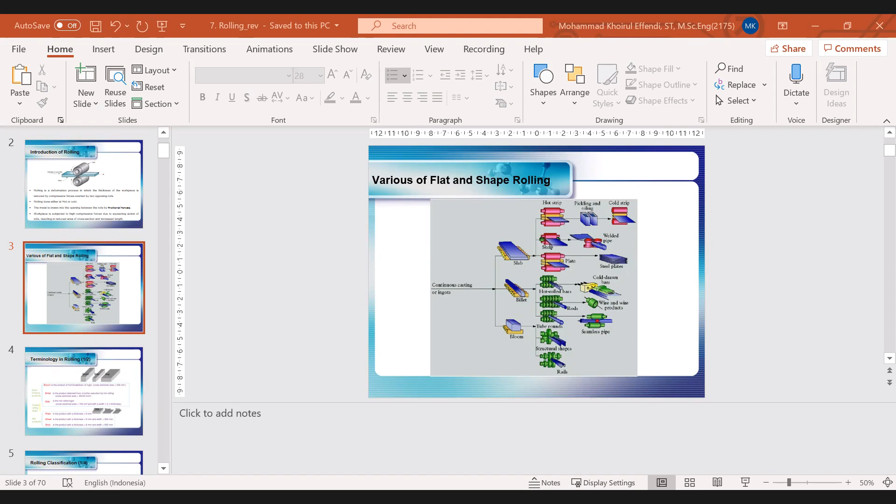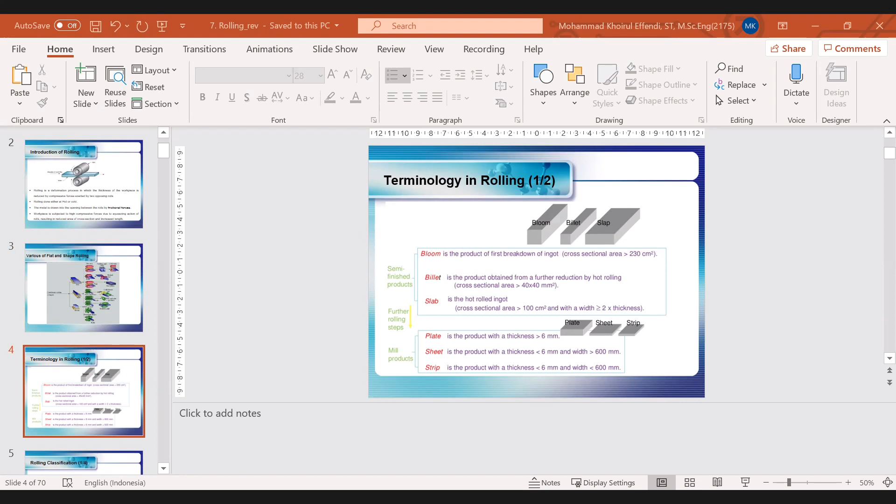Okay, let's continue to the next slide. What is the difference between bloom, billet, and slab? We can see that bloom is the product of first breakdown of ingot, and the cross-sectional area is larger than 230 centimeter square.

Billet is a product obtained from further reduction by hot rolling, and the cross-sectional area is more than 40 by 40 millimeter square. Slab is the hot rolled ingot, and the cross-sectional area is more than 100 centimeter square.

So between bloom, billet, and slab, the parameter that distinguishes these three kinds of raw material is the cross-sectional area. The slab's cross-sectional area is more than 100, and the width is more than 2 times the thickness, making it suitable to produce things like steel plates or welded pipe.

The welded pipe is produced from plate, using a specific roller to deform the steel plate into a pipe shape, then at the joining surface we must perform welding to join it.

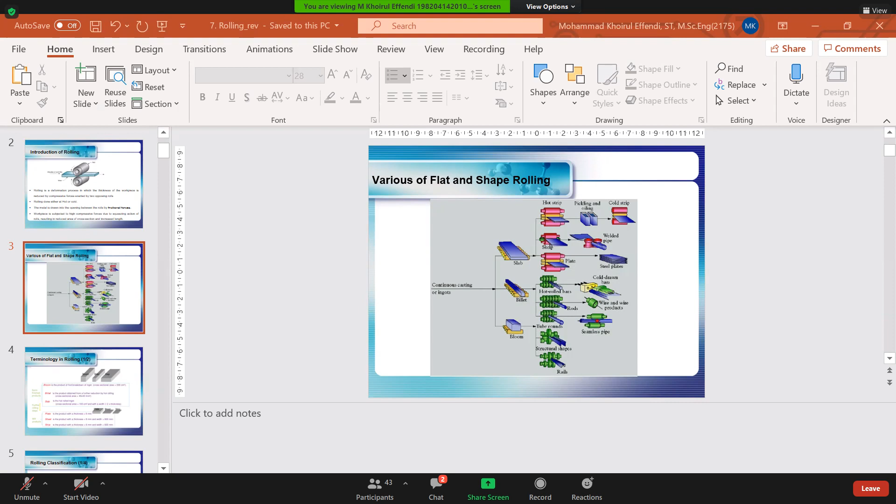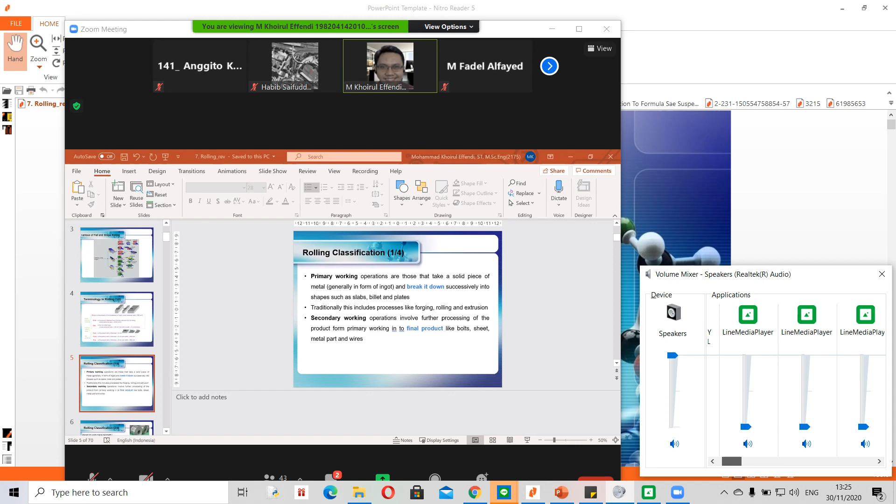So what is the difference between primary working and secondary working in the rolling process? Maybe Fahrul Gunawan can answer.

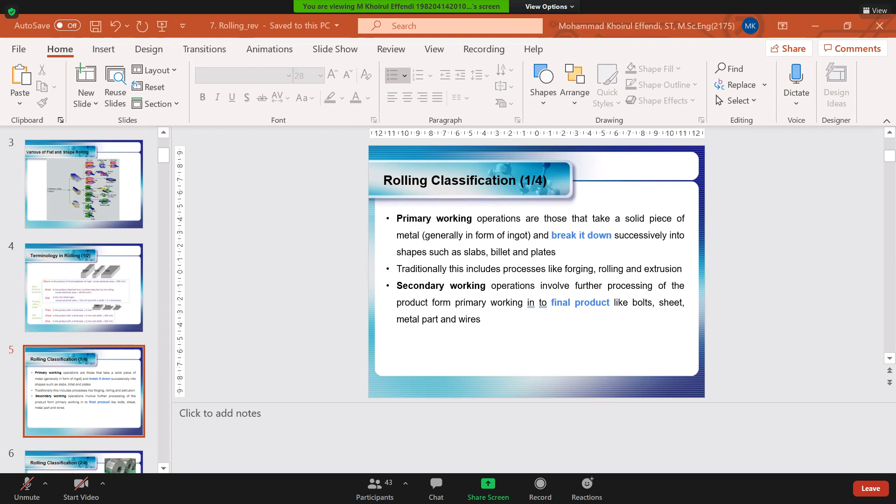So we can compare the product output between primary working and secondary working. Primary working products include slabs, billets, and plates, and we use these as raw material to produce final products such as bolts, sheets, metal parts, and wires.

Based on workpiece geometry, we can classify rolling into several types. We can divide rolling into two different types. The first is flat rolling, whose function is to reduce thickness with a rectangular cross section. The second is shape rolling, where a square cross section is formed into shapes such as an I-beam.

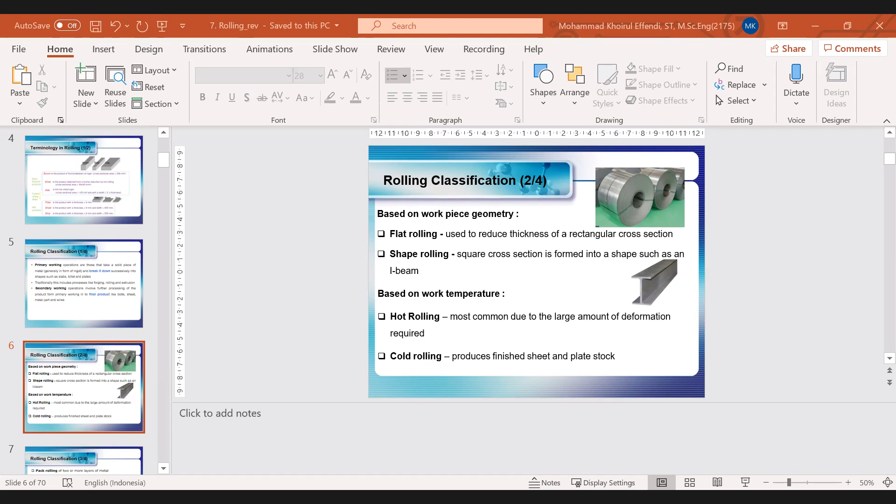Based on work temperature, we can divide rolling into hot rolling and cold rolling.

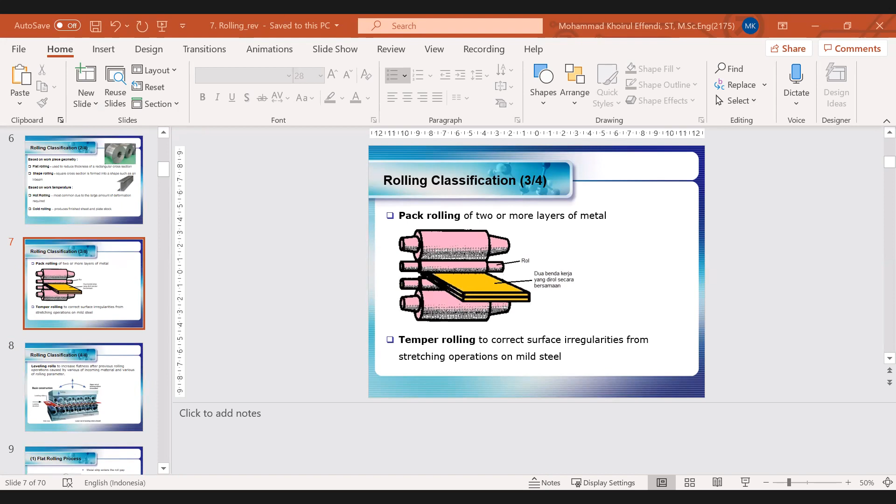And then temper rolling. What is temper rolling? Temper rolling is used to correct surface irregularities from stretching operations on mild steel, similar to a tempering process in material processing. So temper rolling is used to increase the surface regularity of the working material.

The Rifata. I'm sorry sir. Could you repeat the question, sir? Yeah, what is the function of leveling roll in rolling process?

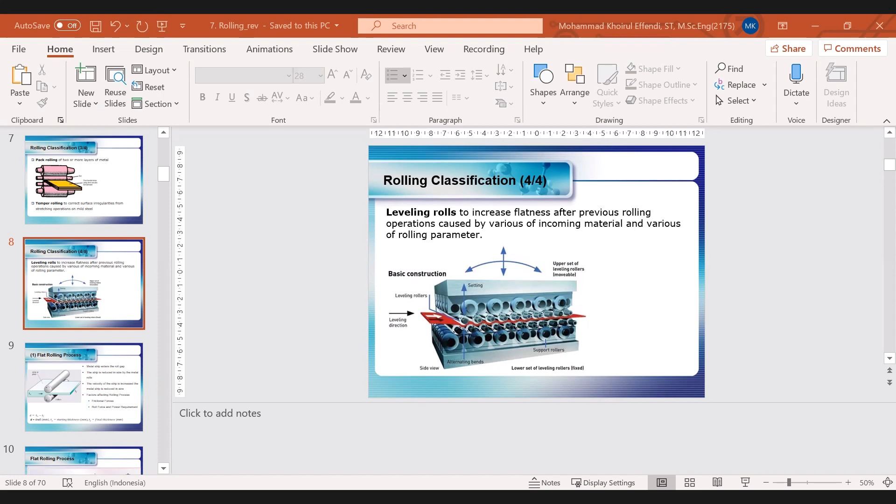Okay, next, this is an illustration of the flat rolling process. Maybe another student, Chiral Nikolaus Pardamian, could you please give me an explanation about the flat rolling process?

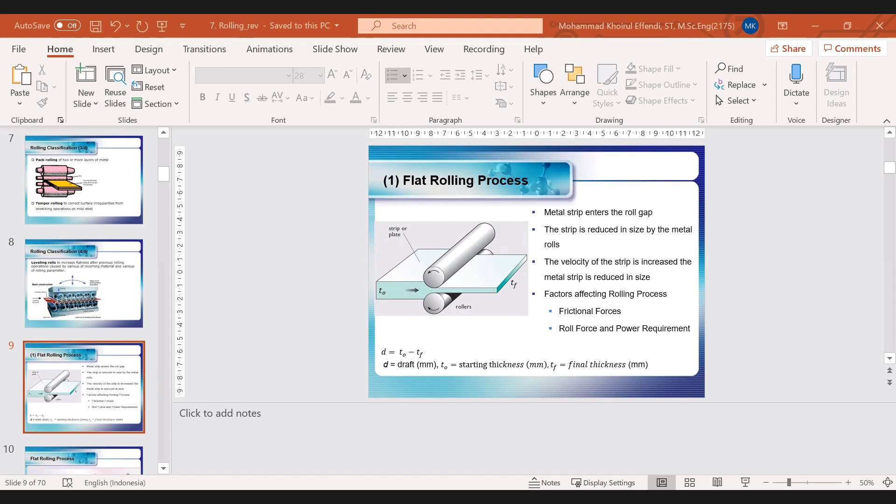So the factors affecting the rolling process in flat rolling are frictional forces, roll force, and power requirement to rotate the roller in the flat rolling process.

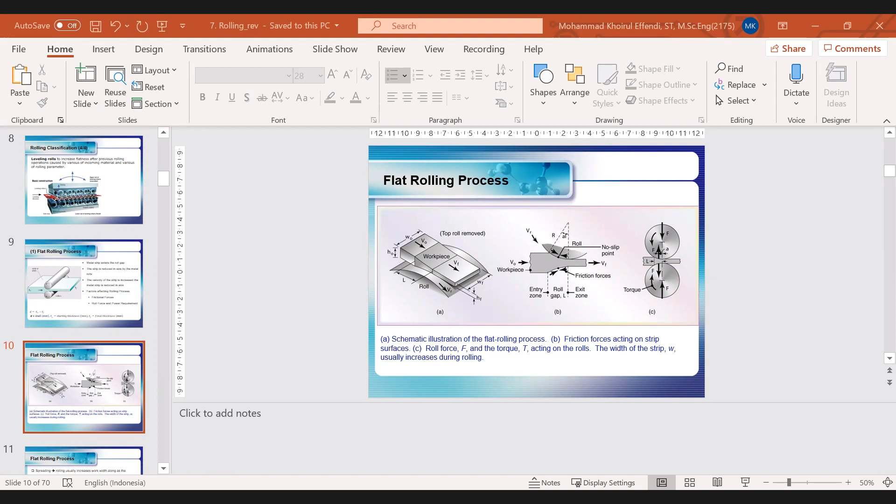And then this is a flat rolling process, maybe you can read by yourself. Of course, the basic rule in rolling process is constant volume. So the volume of material in the inlet port will always be the same as the volume of the material in the outlet port. Okay, and then...

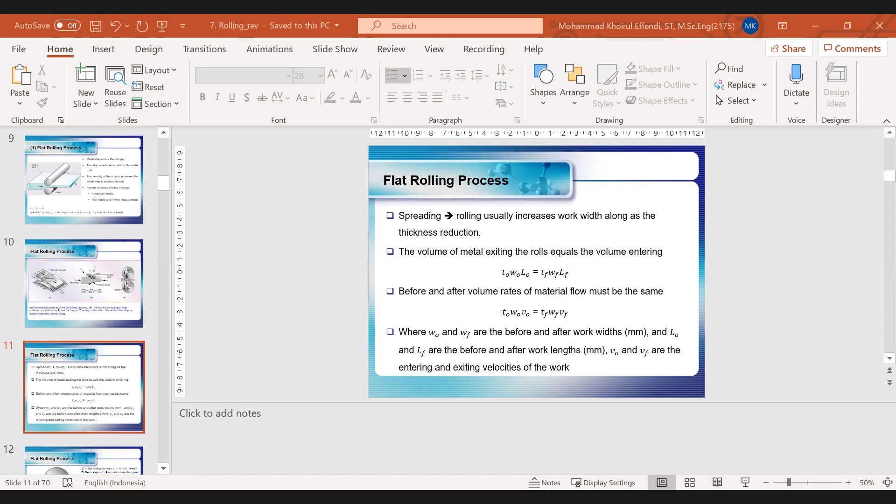In flat rolling, V0 is the initial velocity of raw material before entering the gap between upper and lower roll. And then VR is the roll speed here. And then VF is the velocity of material after leaving the gap between upper and lower roll.

So my question is why? Why is V0 always smaller compared with VR, and also VR always smaller compared with VF? Okay, maybe...

Aldi Muhammad Ridho, ada? Yes, sir. Here, sir. Ya, gimana jawabannya?

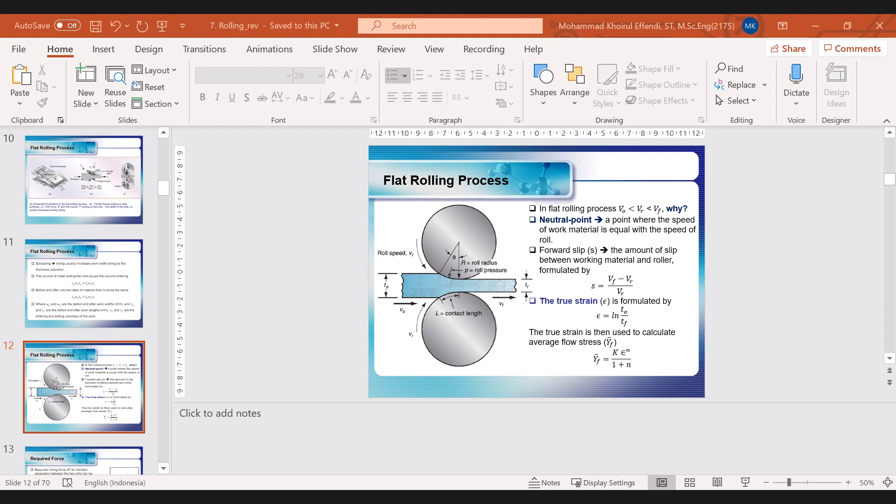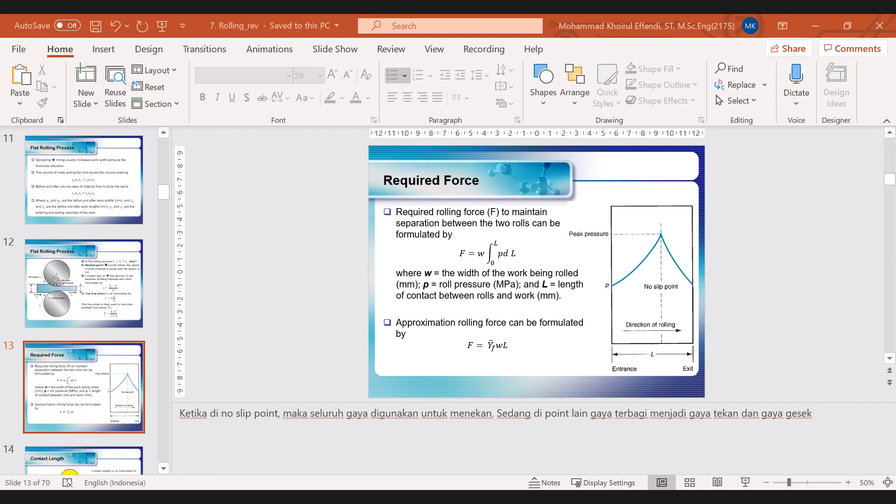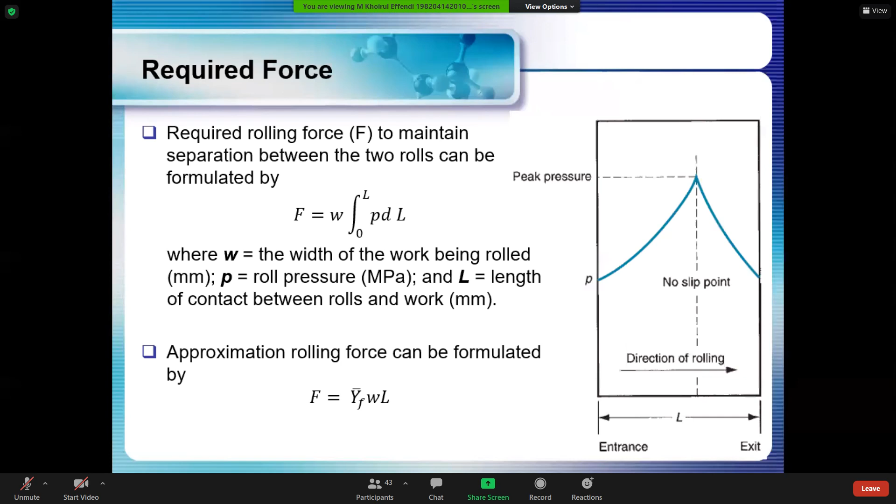Cek. Pak Khoirul hilang ya? Ya. Bubarin wis, wis. Tes. Sudah dengar deh suara saya? Sudah, Pak. Sudah Pak, sudah. Sebentar, saya tak ganti dulu apa internetnya, mudah-mudahan nggak mati lagi ya.

Okay, this graphic shows us the correlation between L and pressure. So what is the location of L? The L is here, this is the contact length, so the contact area of the roller with the raw material. The length is something like this. Okay, and then the peak, you can see the peak.

So the peak value starts from, I don't know, this point, but it starts from here. And then this value of pressure increases from this point until the peak pressure. So my question is why? Why does the pressure of the roll increase from this point until this point? Why?

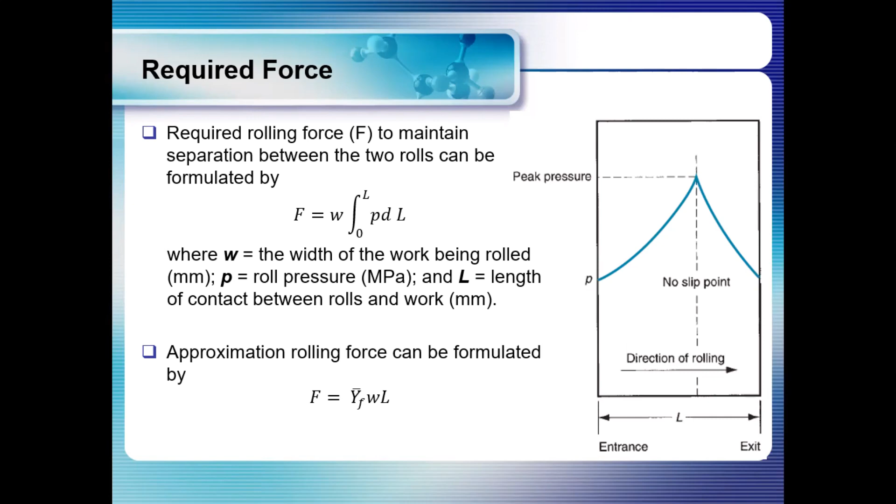Ada pertanyaan mungkin? Excuse me, sir. Saya mau tanya yang di slide 12 tadi Pak, yang slide sebelumnya.

Untuk nilai K dan nilai N di rumus YF itu nilai apa ya Pak? Konstanta di situ. Jadi nanti dia tergantung dari berbagai macam parameter, misalkan material yang jelas di situ, material dari plat yang mau direduksi tebalnya. Jadi sudah ada tabelnya, ini sudah ada standarnya, tinggal membaca. Oh iya, baik, terima kasih.

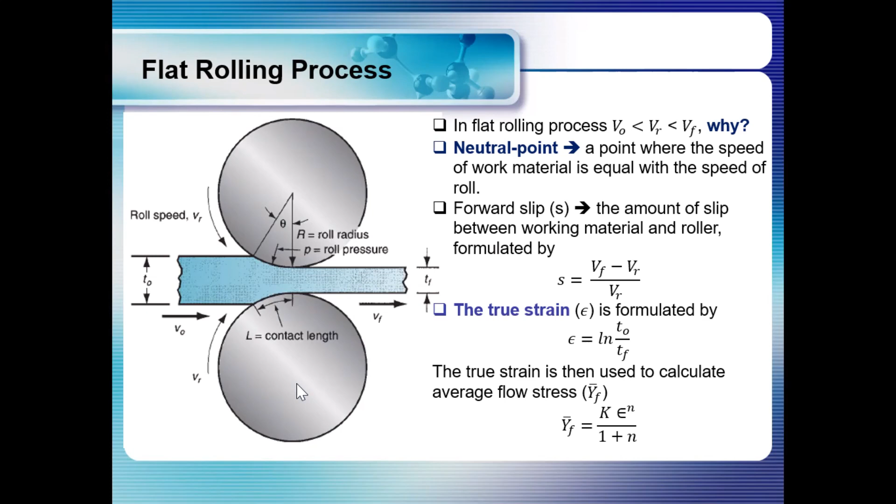Jadi rumus ini berfungsi untuk menghitung flow stress dari material yang mau kita reduksi thickness-nya dari TO menjadi TF. Jadi nanti kalau misalkan berapa sih flow stress yang diperlukan untuk mereduksi initial thickness menjadi final thickness, kita bisa menggunakan rumus ini. Oke.

And then, this is an example of procedure how to determine suitable roller radius. So this roller is able to reduce the thickness from TO to TF. This is an illustration of example calculation how to determine a suitable radius of roller in order to reduce the thickness from TO to TF. So yeah, this is an illustration, just an illustration.

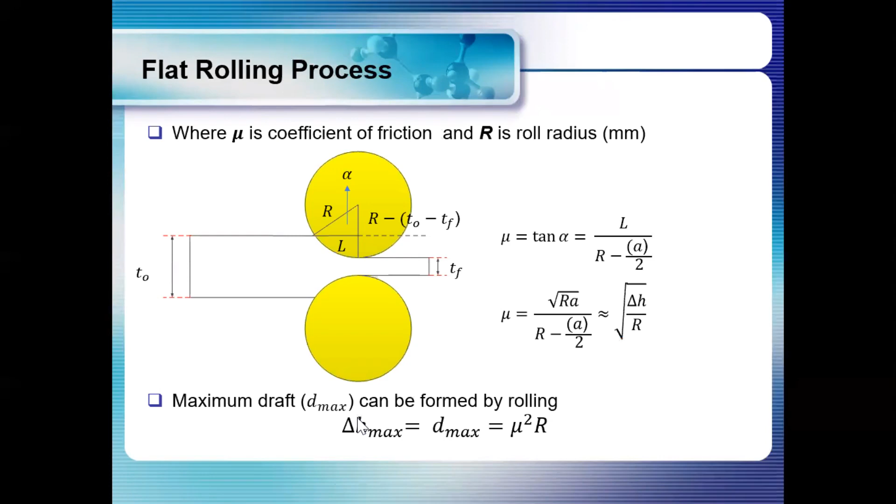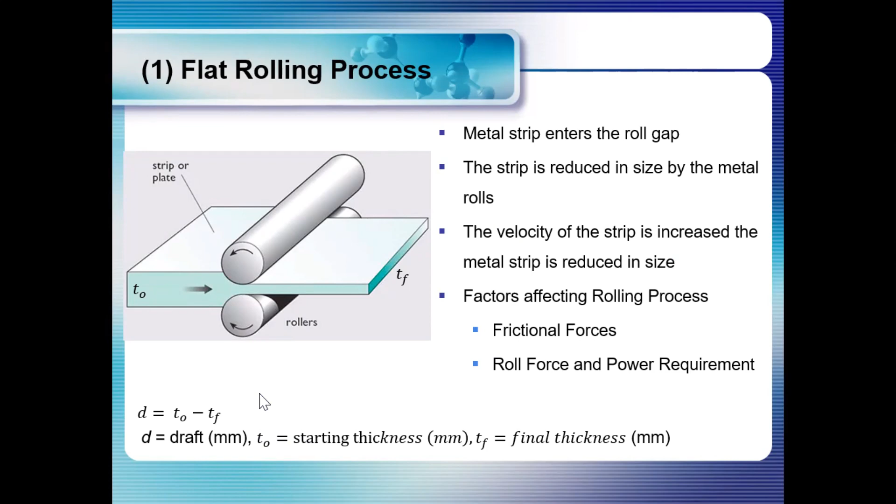And then from this illustration, maybe you can calculate mu. Mu is the coefficient of friction between roller and metal. And then, draft, what is draft in here? Draft is the difference between TO and TF. So the value that we obtain if we subtract TO with TF is called D or draft.

And then this coefficient friction of rolling depends on lubrication, work material, and working temperature. And then we have already discussed about sticking. So sticking is the condition in hot working where the material sticks to the surface of the hot rolling roller, and it's able to reduce the quality of product because the material sticks on the surface of the roller.

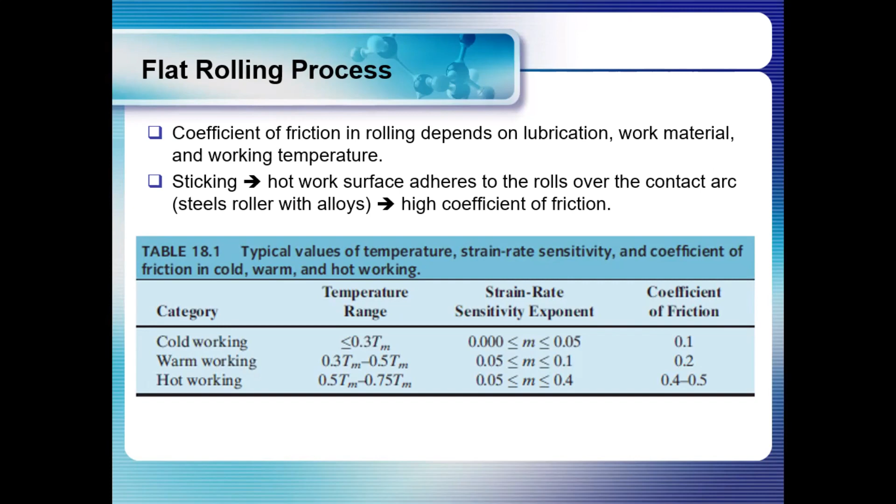And then this is an example of typical values of temperature, strain rate sensitivity, and coefficient of friction in cold, warm, and hot working. So for example, in cold working, the temperature is 0.3 Tm, and also the strain rate sensitivity is 0 until 0.05, and also the coefficient of friction is 0.1. So maybe we can use these properties to calculate, for example, flow stress during the rolling process.

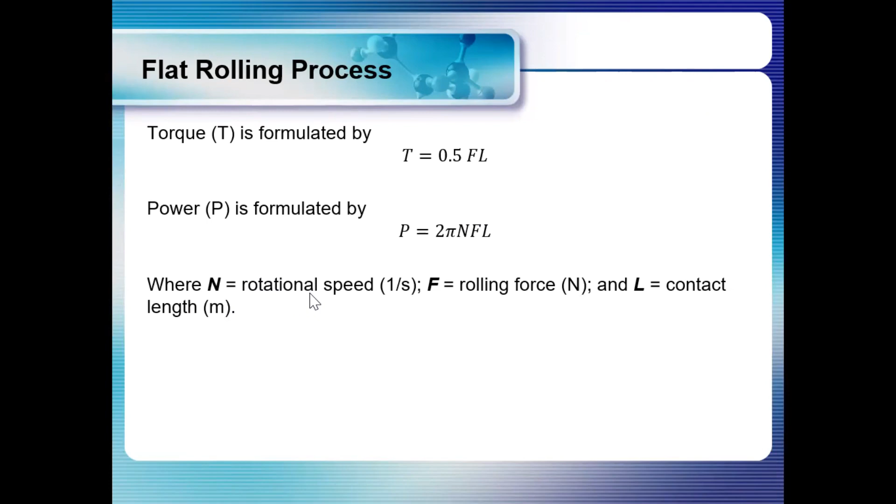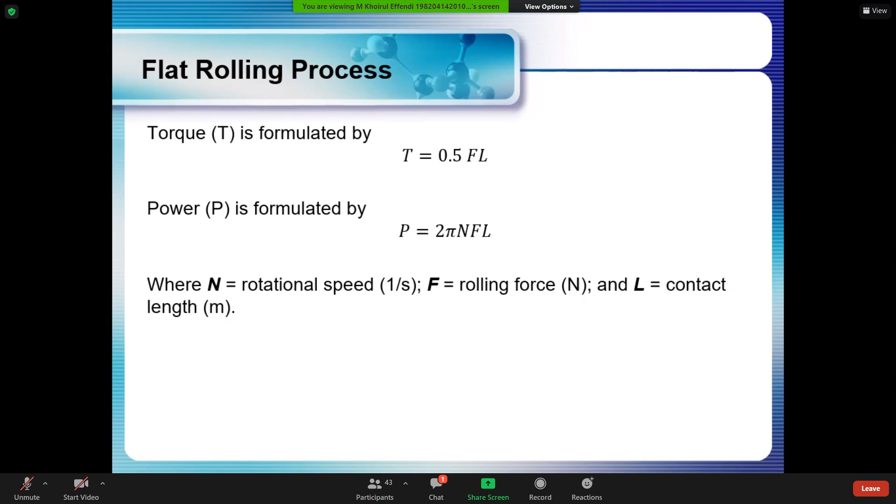Okay, and then this is an example of how to calculate torque, power, and maybe you can see the explanation of N. N is rotational speed, so the unit of rotational speed is 1 per second. And then F is the rolling force in Newton, and L is the contact length, the contact between the roller surface and the material that we want to reduce the thickness from TO to TF.

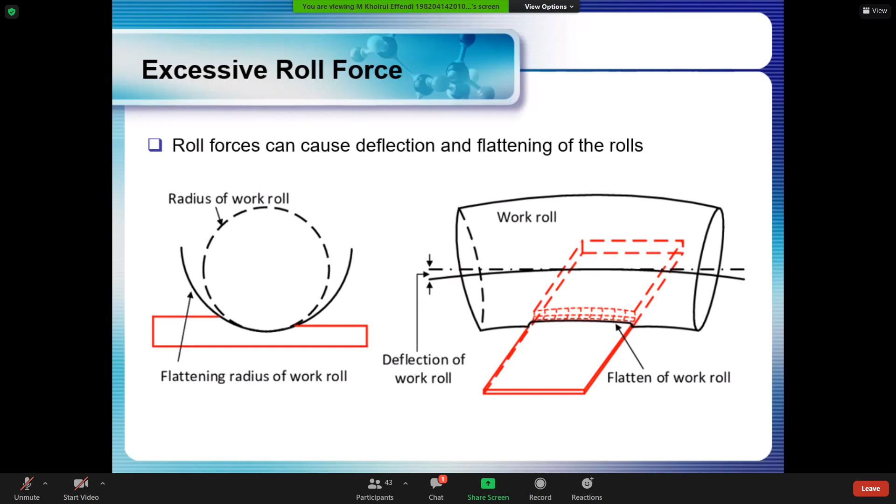Okay, maybe Tommy. The student responds: excuse me, sir, can you please repeat the question?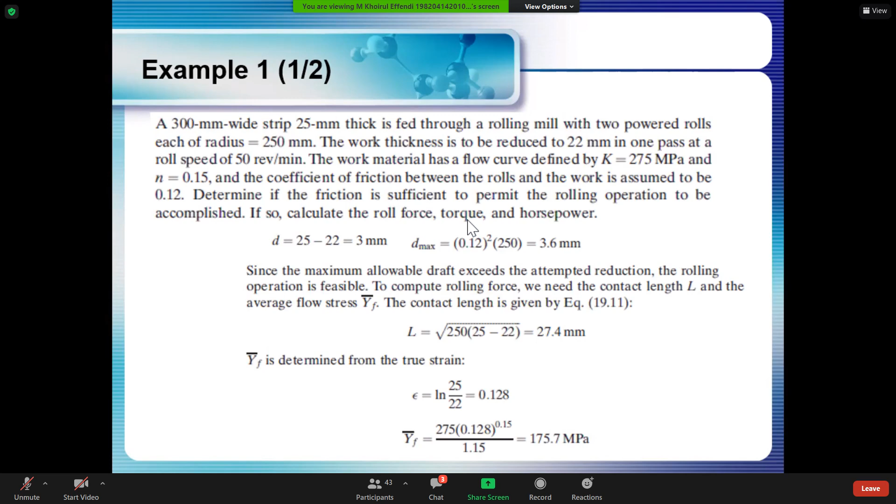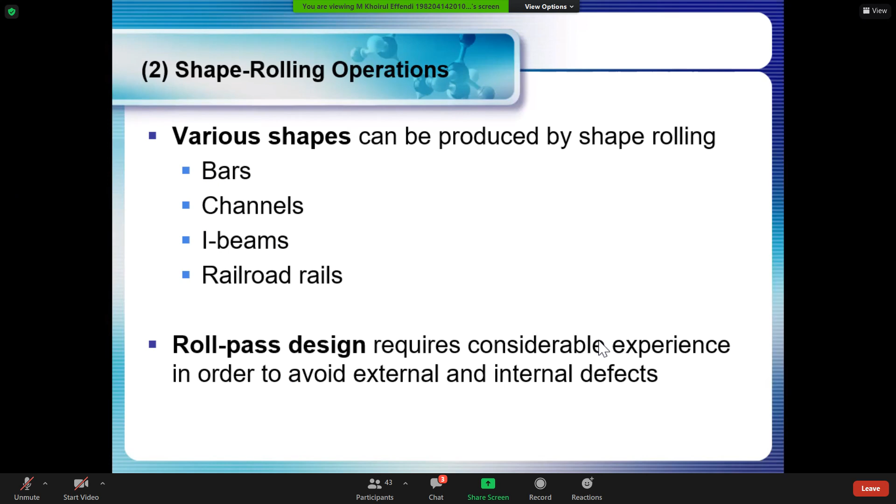And then this is an example of how to calculate roll force, torque, and horsepower using rolling operation. You can read it by yourself. And then this is shape rolling operation. We can see that rolling is able to produce several products, for example, bars, channels, I-beams, or maybe railroad rails.

Okay, maybe Sabrina. Yes, sir. Can you please repeat the question, sir? What is different between two-high rolling mill, non-reverse and reverse?

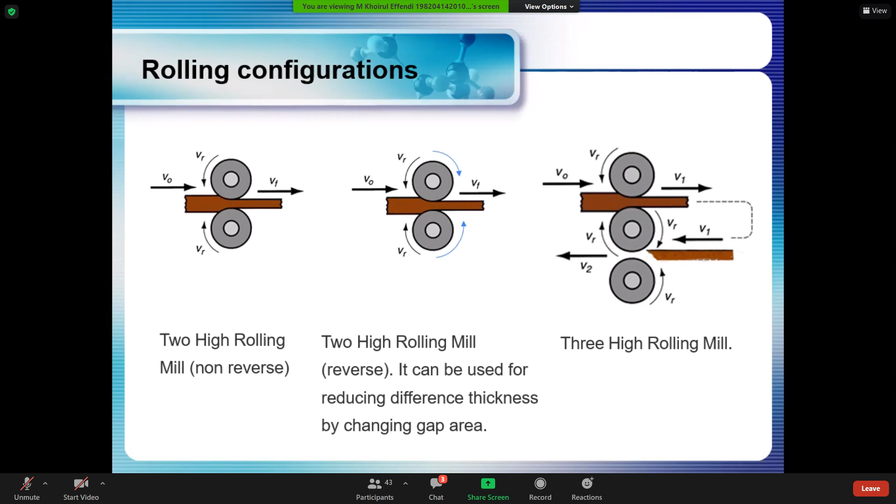Okay, and then this is three high rolling mill, so same with the previous one. This is the first step of the raw material input, starting from this point. So the middle roll will push raw material from the left to the right, and then back again. And then the middle roll now will push material from the right to the left. So this is the system using three high rolling mill in order to reduce the thickness of raw material twice, the first pair and then second pair of rolling in the rolling mill machine.

Okay, and then this is using 4 high rolling mill. In this case, we use 4 different rollers with 2 different diameters. The bigger one we can put in the outer location, and then the smaller one we put in the inside position, so that the small roll will transfer the pressure into the surface of the raw material, something like this.

Or maybe we can use a cluster rolling mill, something like this. It's almost the same as the previous one. So we try to distribute the pressure that occurs in the contact roller here. Using this roller, we hope we can increase the lifetime of the roller, and also reduce pressure that acts on the surface of the roller.

Or maybe we can use tandem rolling mill, so we use several pairs of rollers here to gradually reduce the thickness of raw material from TO, maybe this is TM, until the TF. So we choose 3 pairs of rollers here, the first pair, second pair, and the third pair, in order to reduce the thickness of raw material from TO to TF.

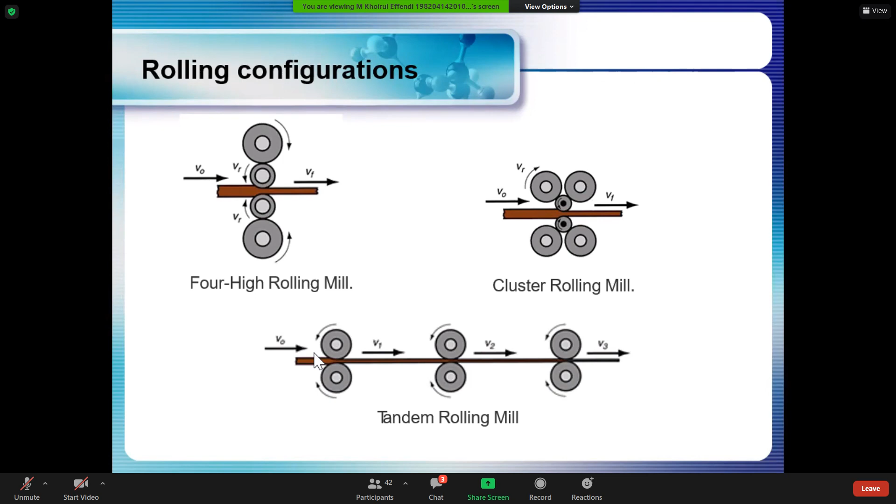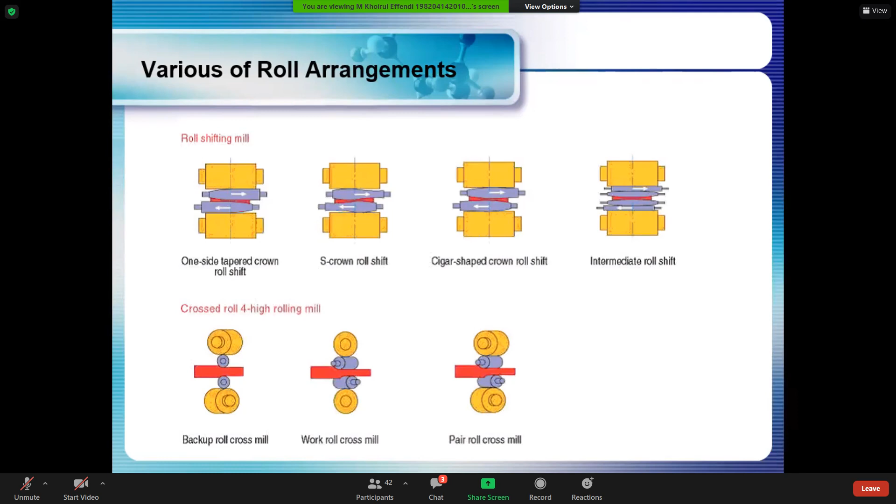Okay, and then this is various roll arrangements. So this is roll shifting mill. Maybe you can see the slide, and I think this is not too difficult to understand.

Okay, any question about this slide?

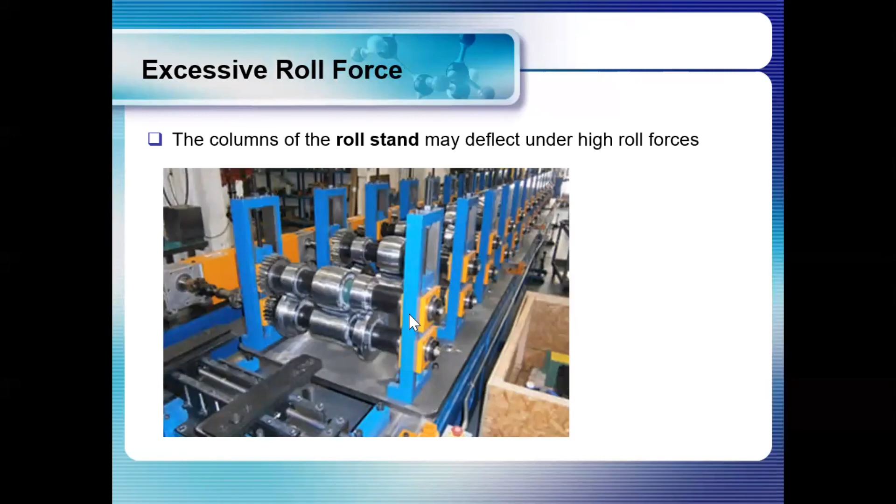Terus yang jadi problem apa? Di bearingnya ini yang jadi masalah. Jadi power atau pressure itu disokong oleh bearing ini aja. Tapi kalau modelnya seperti cluster, pressure yang ditransfer dari roller ke benda kerja tidak disokong oleh bearing yang ada di pojok ini aja, tapi disokong oleh permukaan roller yang lain.

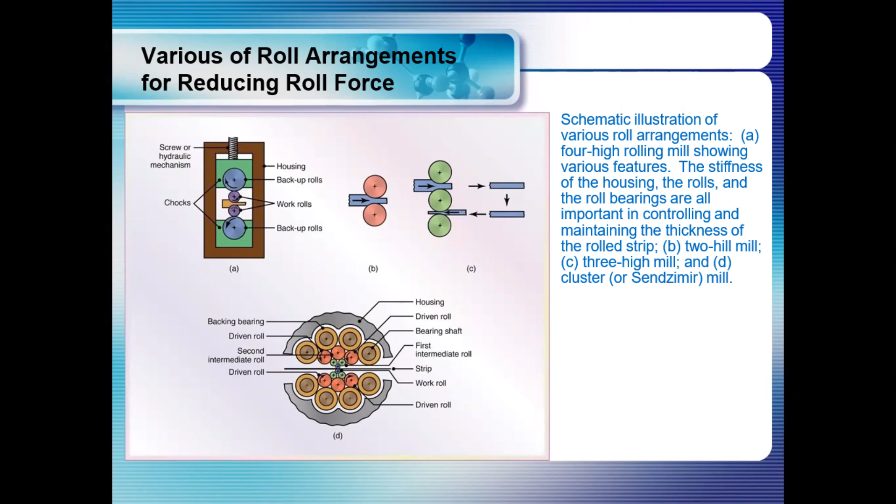Walaupun ini akan mengakibatkan gesekan, tapi ini jauh lebih aman kalau dibandingkan satu roller aja. Kalau di sini dia sudah dibagi menjadi beberapa titik sehingga harapannya jadi lebih aman. Oke, ada pertanyaan lain mungkin?

Oke, sama dengan yang ini. Kalau yang ini, walaupun fungsinya kenapa kok diputer gini? Kenapa kok diputer di situ? Kira-kira untuk apa? Kenapa kok nggak di tandem gitu aja?

Misalkan ini kan ada yang tandem. Jadi dari T0, misalkan T1, T2, T3 dan seterusnya. Ketika dibuat tandem seperti ini, maka sistemnya akan lebih gampang dari 1, 2, 3. Tapi kenapa kok dibuat seperti ini? Apa fungsinya itu?

Muhammad Rizky Pratama kira-kira. Yes.

Menurut saya itu untuk mengurangi ruang yang dipakai rollernya, Pak. Jadi tidak memerlukan ruang yang sangat banyak. Ya benar. Alasan pertama adalah untuk mengurangi space, sehingga kalau model seperti ini dia butuh ruang yang sangat banyak. Tapi kalau ini kan kita bisa compactkan.

Tapi kira-kira kerugiannya apa? Nicholas Prayandi, kira-kira apa kerugian dari model seperti ini? Kelebihannya kan dia compact, nggak perlu banyak ruang. Tapi kalau kita buat seperti ini, kerugiannya apa?

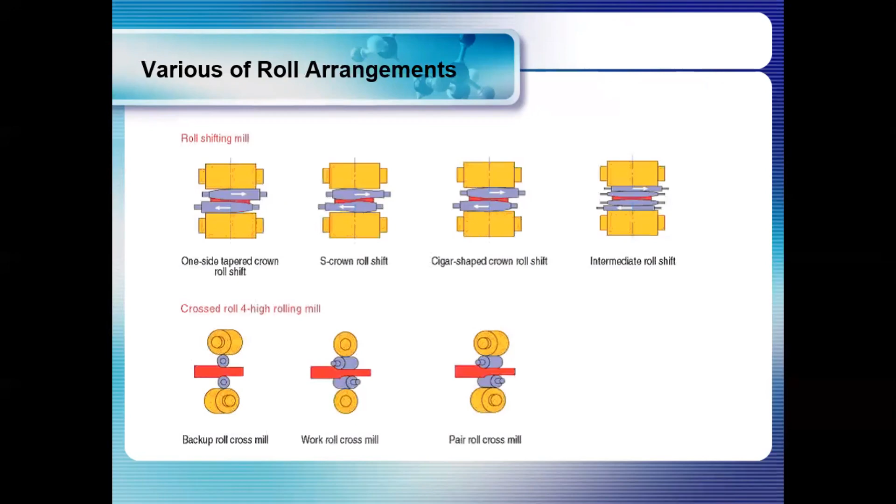Ya, ini sebenarnya dikasih roller lagi deh. Jadi Anda kasih roller aja nanti dia muter di ujungnya sini. Rollernya kayak model yang awal tadi ya, sebentar. Nah ini modelnya kan dia roller, bending dia. Jadi dari sini diputer aja ke belakang, bisa di situ, nggak perlu manual, dia pakai roller aja yang nanti langsung diputer di situ.

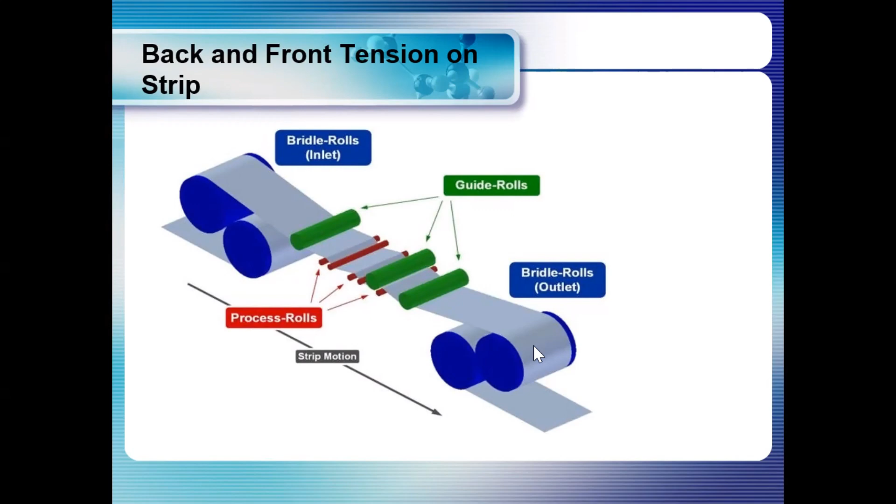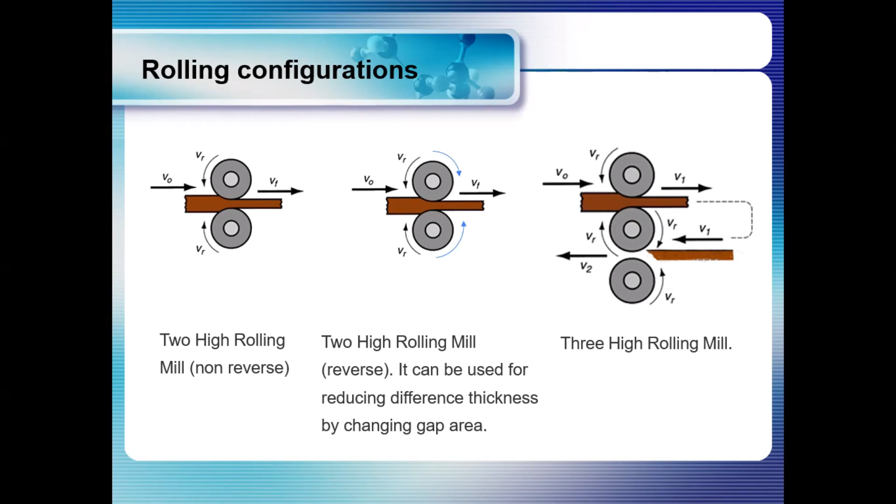Nah di sini perlu perhitungan matang supaya tekanan yang terjadi di atas sama dengan tekanan yang terjadi di bawah sehingga nanti dia bisa stabil di posisinya. Oke, seperti itu kira-kira. Ada pertanyaan lain mungkin?

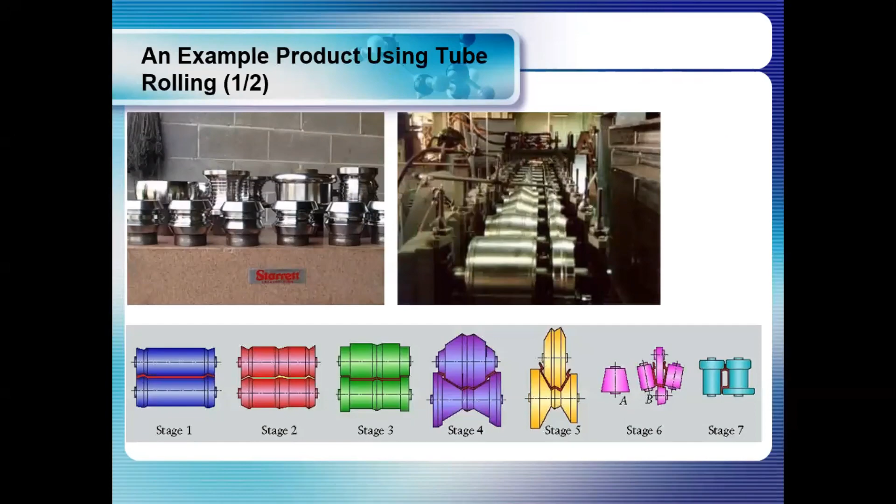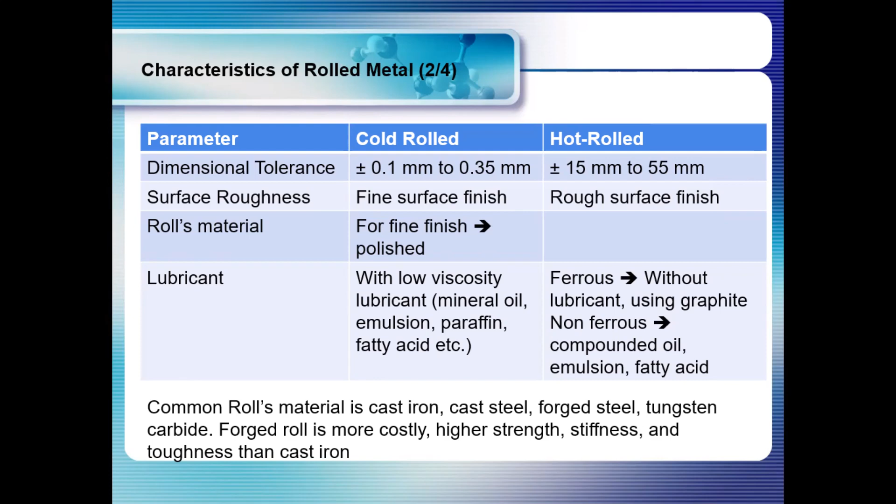Oke, ada pertanyaan? Masih banyak ternyata. Jadi nanti kita sambung minggu depan karena sudah 90 menit. Kita separuh, sepertiga, 2/3-nya lah. Kalau ini sudah mendekati 2/3. Jadi nanti saya kasih tugas supaya Anda bisa membaca di situ.

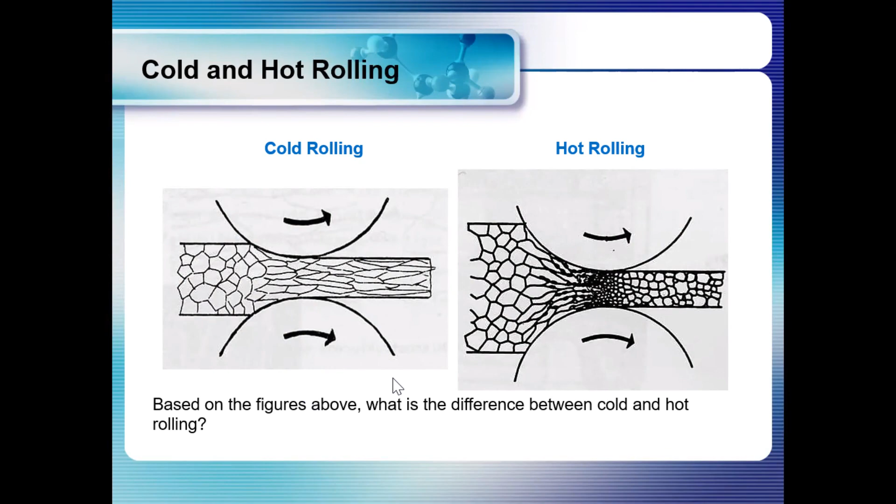Oke, ada pertanyaan sebelum saya akhiri? Sudah jelas semuanya? Atau semakin nggak ngerti? Jadi intinya cuman rolling aja, cuman roll aja itu, untuk membuat plat dan sebagainya.